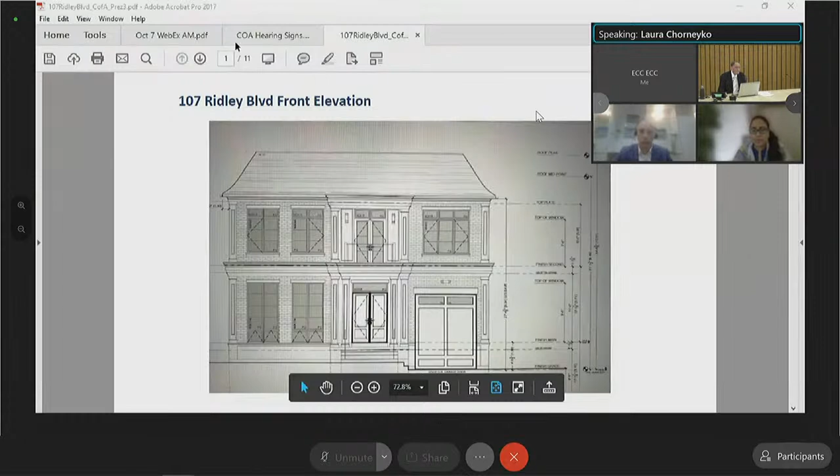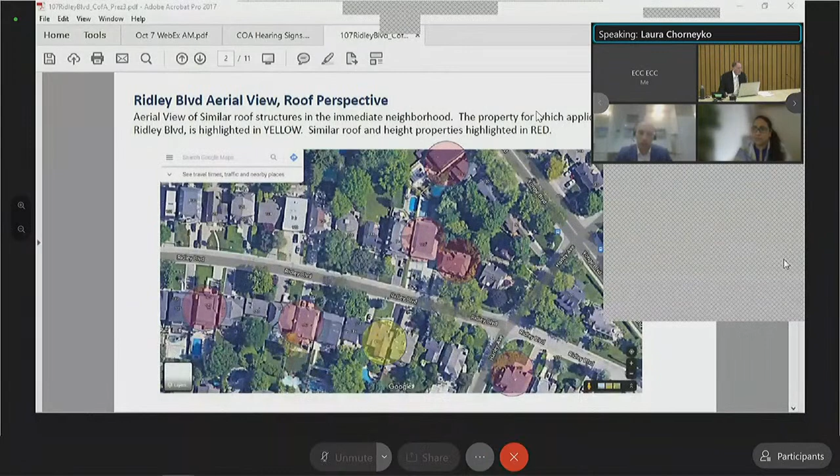The first one would be the roof structure and the aerial view. Next slide, please. I have the aerial view of similar roofs in our block only. They have all the same architectural design as the one that we're proposing, and they're flat on the top. All those houses, next, you can scroll down please, all those houses are in the 10 meter height.

And yes, our roof was deemed flat because we did not meet the slope standards. But at the end of the day, from the street perspective, it will look the same as if it had the full facade. It will be exactly the same height and will not deviate from the current height standards seen on the street. Furthermore, I would like to propose that this variance gets approved conditional to reducing the building height from 10.53, that I'm proposing, to 10 meters, so I stay exactly in line with most of my neighbors.

Also, the letters of objection submitted to this committee, the main concern is setting undesirable precedents. However, during the design phase of this house, we reviewed many committee decisions of the last few years just to ensure that our proposal was consistent with what had been approved in the past. We chose a few ones on our street or close area to present today, so this committee can see that our requests are not unique or disruptive.

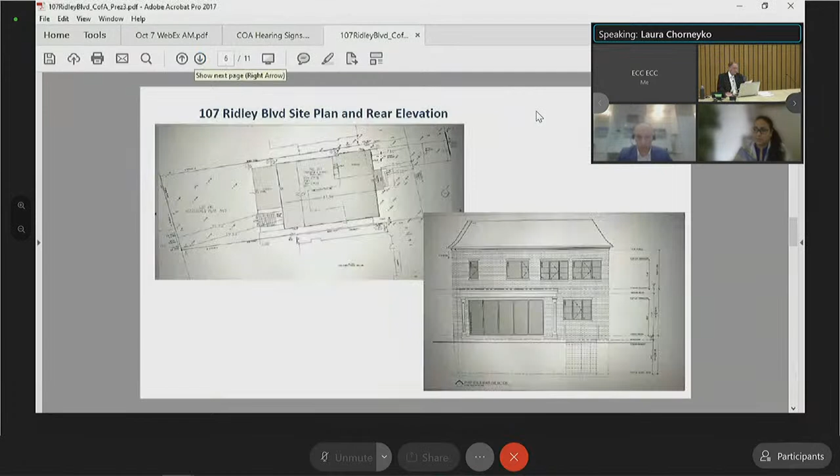Talking about this, next slide please. Talking about the side yard setback, yes, as you can see on my site plan, we reduced the east yard setback. It's mainly due to the fact that our lot tapers on the east side. We try to minimize this issue by recessing the house as soon as the garage ends, so it goes from 0.99 to 1.36. We also did not put any windows on that side of the house to prevent any exposure or lack of privacy.

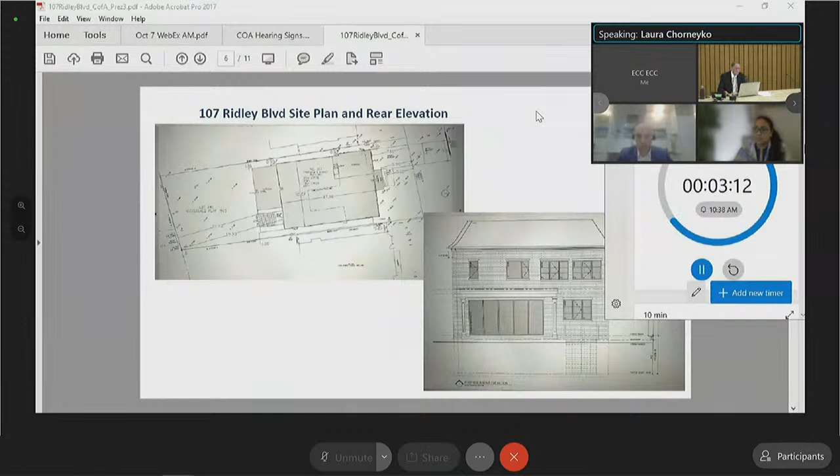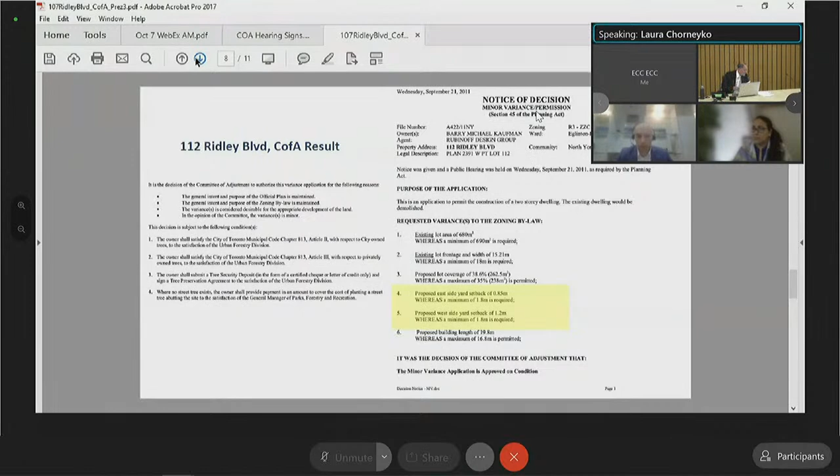I'd also like to point out, next slide please, that 119 Ridley Boulevard setbacks were approved as 0.45 and 0.49, which is half of what I'm asking. In the next slide, you'll see that directly across from me, 112 Ridley Boulevard was approved at 0.85, with a frontage of 55 feet compared to mine being just 50 feet.

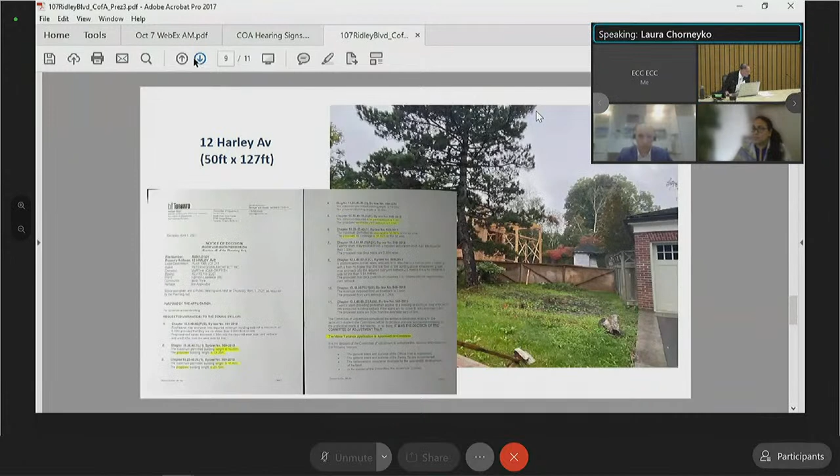Next slide shows that in April this year, 12 Harley, directly behind me, was granted 1.03. So we believe our variance is much in line with what's being approved as exceptions. In terms of depth and length variances, the major issue here is our excavated covered patio. The house itself is only 17.98, and our next door neighbor is 17.5, so we are right there with our neighbor. This was a design decision made to provide storage without compromising the amount of greenery and trees.

We have no access to this area from the house, as it's just for storage. But if we don't excavate our patio, we need to install a shed and remove several trees in the back. Removing the greenery will also reduce privacy, which we know is a major concern for our neighbors, as it is for us.

Again, we are not setting any precedent. As you can see in this notice, 74 De Vere Gardens was granted 21.48 length and depth, and 120 Ridley, a few houses down the street from us, had 24.11 depth and 24.14 length approved, while our proposal is 22.27 depth and 22.55 length. Nevertheless, if this committee feels it's necessary, we are willing to compromise by reducing our length and depth by 1 meter, reducing the excavated area.

The next thing I'd like to address is the Parks and Forestry report received recently. The main issue here is the birch tree. This tree has a diameter of only 31 centimeters, so one year ago it would have been below 30 centimeters and I could have removed it without a permit. So it's not a landmark tree from the neighborhood that needs to be preserved at any cost. Even the condition of this tree is questionable.

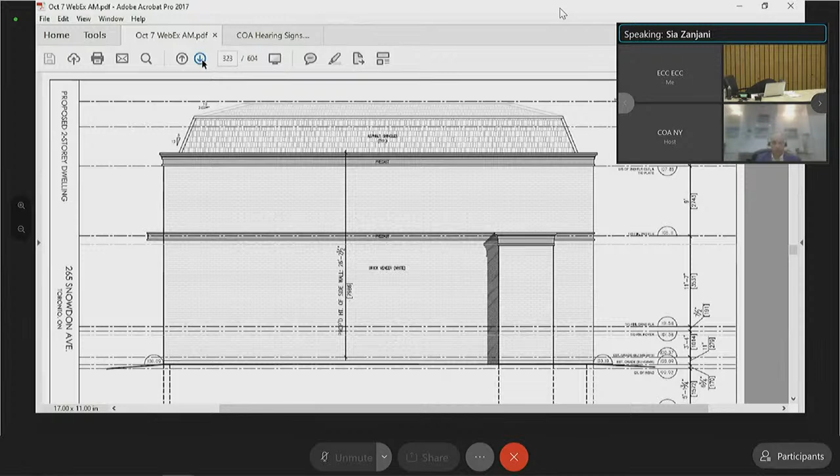In terms of size and FSI, I want to emphasize to the neighbors and committee members that we are 100% complying with every aspect of the zoning bylaw. Even if we comply with the 0.35 FSI and lose an entire floor to meet that, the footprint and massing of the building would not change an inch. That's something I really want to emphasize.

And like I said, our clients have owned this property for the past 10 years. Just recently they decided to build this as their home, hopefully their forever home. They have 3 kids ranging from 4 to 17 years old, with a full-time nanny.

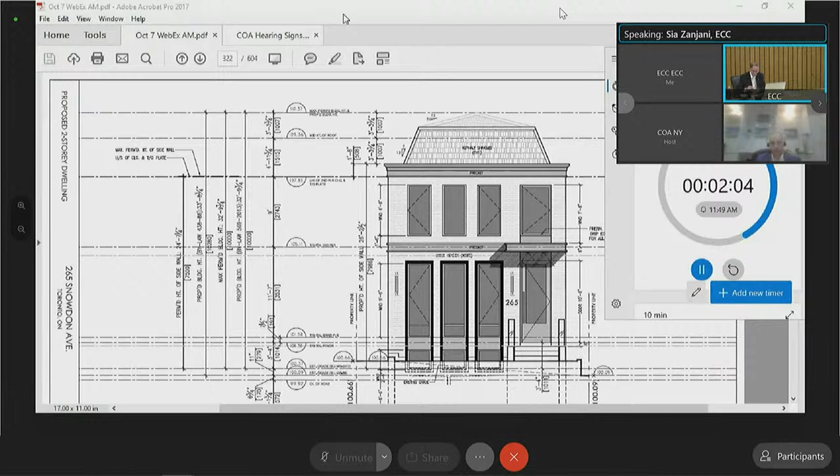Any minor adjustments to the FSI we could probably entertain, but through discussions, neighbors requested FSI as low as 0.5, which would require losing an entire bedroom. As you've probably seen, this is a 3-bedroom house, and they have 3 kids, so as it stands, one of their kids would have to be in the basement. Unfortunately, that's not something we were able to entertain.

Having said that, if the committee members find it appropriate, we are willing to reduce the FSI from 0.678 to 0.67. That would be a slight reduction in length without losing an entire bedroom on the second floor. So we are willing to make that adjustment.

Excuse me, you say if the committee wants, you're willing to make the adjustment, but we don't negotiate. Tell us what you want to change it to. We would go ahead and proceed with that change. So you want to change number 1 to what? Number 1 would change from 0.678 to 0.67.

Okay. And anything regarding water issues, we leave that up to our qualified grading engineers and the well-respected engineers at the city, who will be approving this application later on, to address any issues. And that's it. Thank you. Okay, thank you.

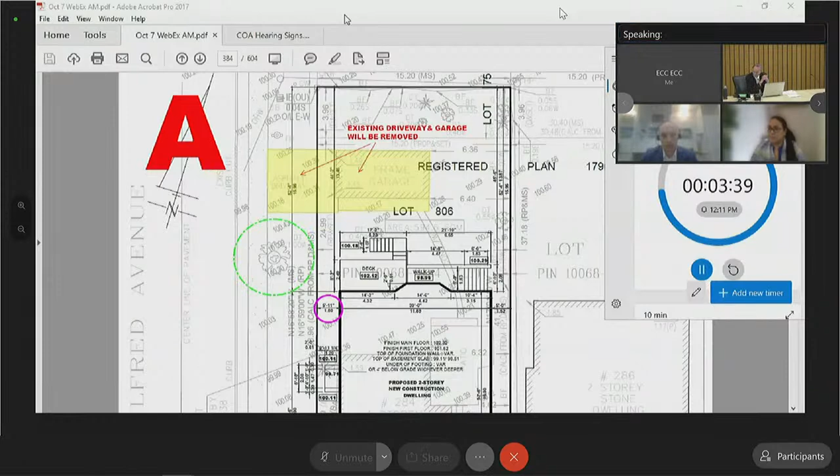I explained to the transportation department that we do need this variance. The main concern is it is not safe to put the driveway on the other side. As of right, we can have this driveway backing into Wilfred Avenue. This is a corner lot. The Wilfred Avenue, Wilfred Parkview intersection has a full stop sign at the Parkview direction, but Wilfred Avenue does not have a stop sign. So a few factors kick in. First of all, the speed of the cars on Wilfred Avenue, they're moving at the allowable speed limit without stopping at the intersection.

There is the presence of very big mature trees that are limiting the view for the cars passing, as well as the view for the person who's backing up from the house into the street. There is a very proximate sidewalk on that side, as you can see on the site plan, which means when a car is backing onto Wilfred Avenue, before the driver is even leaving the garage, the back of the car is at the walkout. This is proximate to Earl Haig School. Many children and school kids might be on that sidewalk, so it's dangerous.

We think that for all those purposes, it's not safe to have any driveway on that side. So I explained this to transportation yesterday, which I eventually got a hold of Mr. Godley Abraham. I have a pile of evidence for almost every intersection in the neighborhood with the same situation working properly. Unfortunately, because I received that objection very late, after our deadline to submit support material, I couldn't submit those, but I'm sure the panel members are very familiar with the area.

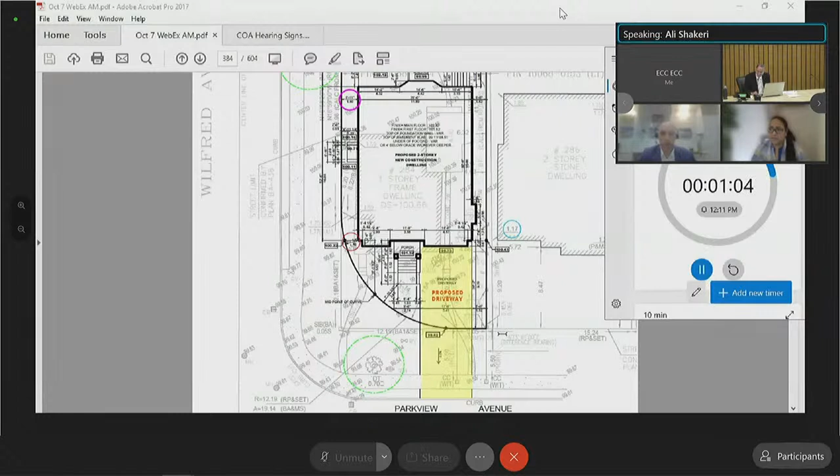You said many others have the same entrance, but transportation is saying this particular one is close to the stop sign. You said you discussed it with them yesterday, what was the result? They didn't respond to my rationale, basically. I think Mr. Abraham was agreeing, or not responding to my rationale. Basically, he left it to the committee to decide.

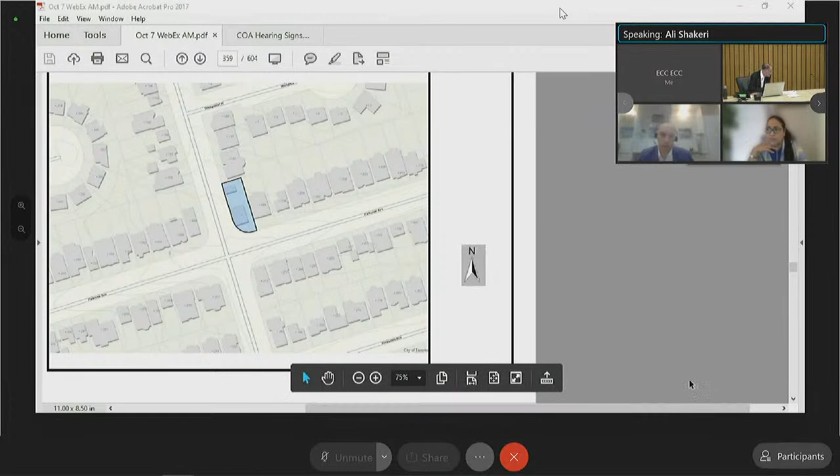But, okay, for the same reasons, what is at stake here is public safety, and we do have to keep the driveway over there for the safety of the public. That stop sign at the corner basically limits the speed of passing cars from Parkview. Also, a longer driveway allows more time and a better field of view for the car backing up into Parkview Avenue, which we don't have on the other side, let alone that Wilfred Avenue is a higher speed street, and cars do not stop at the intersection. So that, I would say, imposes a danger when a car is backing up into the drive.

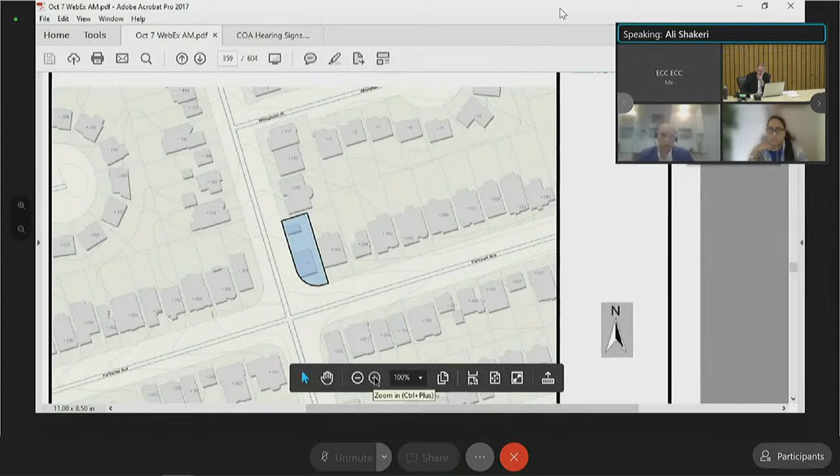Okay, thank you. So let's see what the members are saying. These members, we don't have any other speaker here, just the agent. Any question, Ms. Sankar? Go ahead.

So as I understand it, and I just have to clarify, even though transportation has come back and said, here's the update, it's not an outright refusal, we just want number 7 refused. There was a discussion between transportation and the agent yesterday, but there's been no updates since then to us. So all we've got is what is in front of us, which means I'm not in a position to ignore what transport has said. There is nothing else that's been updated. So I want to offer the agent, perhaps if he needs more time, to defer this application so he can have a discussion with transport, because at this time I'm not prepared to go against what transport is proposing. Through you, Mr. Chair, I'll motion to defer this application if that's possible.

Okay, well, Mr. Shakeri, did you hear what the members are saying? Yes, I heard, and I thank you, Ms. Sankar, for offering that.

I would say that this is going to impose a delay on this project. We can redesign this house with a driveway on the other side, and it doesn't change anything on the floor plan of this house. We can flip the design and have the garage backing into Wilfred Avenue if this panel finds that more appropriate. It rested with me to raise the issue of public safety in this regard, and I do believe it's more appropriate to have the driveway as proposed. But if you agree, I wish to proceed, even if I jeopardize that variance number 7.

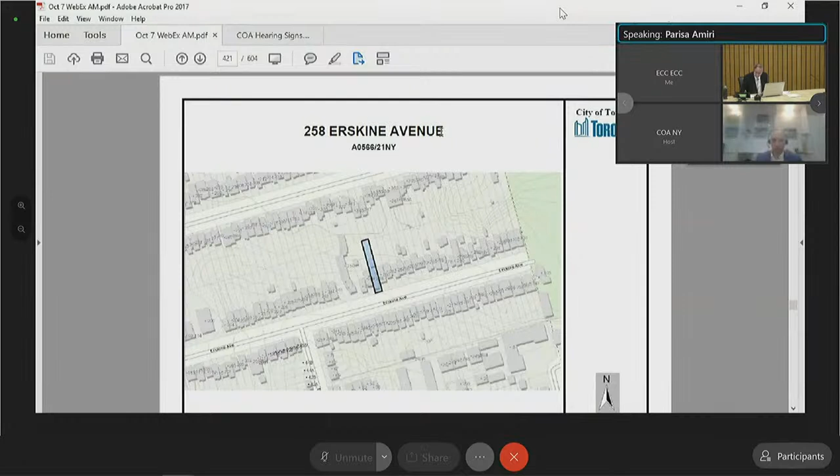Yes, this is a new house that my client wants to build for himself and his daughter. And this is a very deep lot, which is 57.17 meters by 7.62 meters for the frontage. We are requesting only one variance, and we are respecting any other variances that may occur.

And we are respecting any other zoning bylaw. Although my client would be able to build a bigger house based on even the bylaw, we are keeping the space and FSI only at 53% instead of 60%. And this lot is on a positive slope, and we try to bring the house as close as possible to the grade. This is a very unique design my client wanted to have. It's sloped in the front and goes to the back with a flat roof.

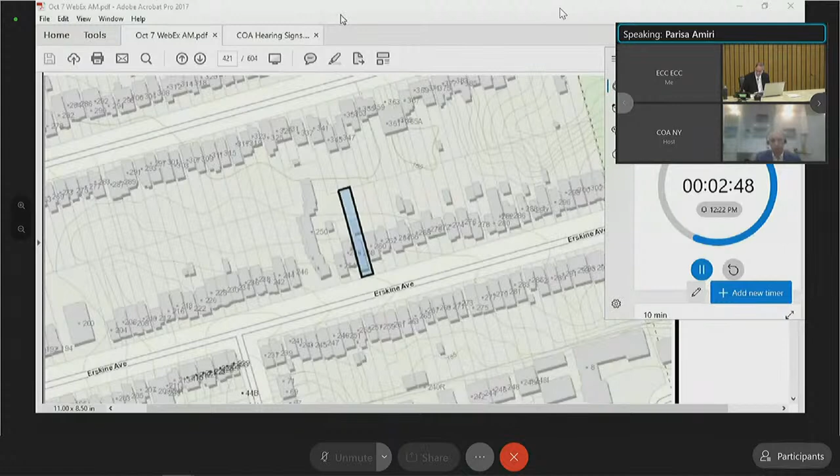And the reason we are asking for that variance is the flat roof at the back. So because it's a combination of these two kinds of roof design, we came under the main wall height variance, and instead of 7 meters, we are asking for 8.53, because they counted to the top of the flat roof. So there is not much I can explain about this application because it's only one variance, dealing with the main wall height, which is a combination between these two roof designs, and we are okay with the total height, which is 9 meters. If there are any questions, I'm happy to answer.

Thank you. When you said the land slopes, is there a difference between the corner of the road and the lot size? Yes. Do you know how much that is? What's the difference? Yeah, I can tell you, it's almost 60 centimeters. Oh, 60 centimeters, okay, thank you. Okay, so we'll bring you back after we hear from the speaker, see what they have to say.

Jim Poole, are you there? Yes, I am. Okay, can you please state your name and address for the records and tell us your concern about this application? My name is Jim Poole, 256 Erskine Avenue.

My concerns are I'm assuming everything is fairly preliminary in the plan that's been presented, and we are going to get some professional help to advise us. Other than that...

I got some simple questions, like there's a board fence shown on the plan that's going to run down the entire side of the new build. I guess the question is, is that true?

Could you please finish? We don't answer your question here. Could you finish and we'll have the agent answer? Your question is, could you repeat that question so she'll understand it very well. In the survey that's online, there's a board fence, a new board fence going to be constructed on 258, on the east side of 258.

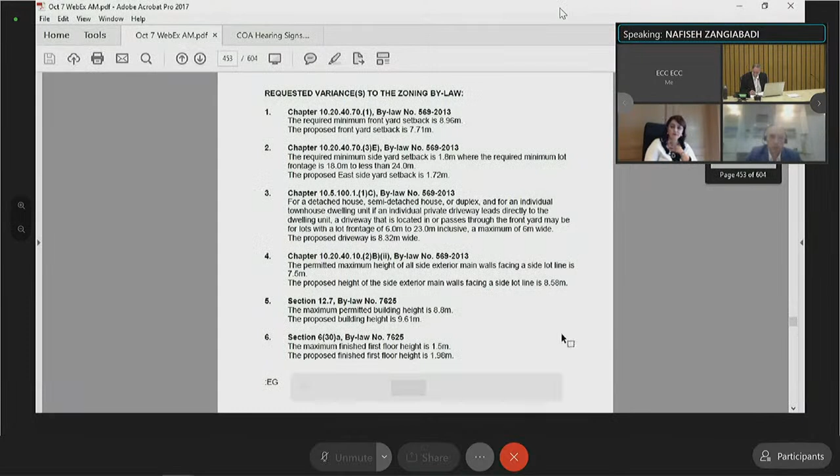Sure. This application is to construct a new 2-story dwelling, and we are actually requesting 6 variances. 3 of them deal with the height. Out of those 3, 2 are technical. Variance number 5 and 6 are due to the change of grade and the way the height is calculated under the old bylaw. We don't have any height variance under the new bylaw.

Variance number 4 is the height variance for the side main walls, and the reason is that we have a gable on top of the window on the side, which gives us the number of 8.58 meters, whereas the entire side wall we are at 7.5 meters. That means most of the side walls on both sides comply with the requirement of the zoning.

Variance number 3, for the driveway, we have communication with the planning department and they're in support of the application because the width of the driveway, which is 8.32, is only within our property. We reduced the width in the public right of way to 6 meters, which transportation is in support of.

And variance number 2, setback, is just nominal and it's only in the front corner of the house, and the way the lot is positioned and the house is positioned in the lot, it's going to increase along the walls as we move further to the back.

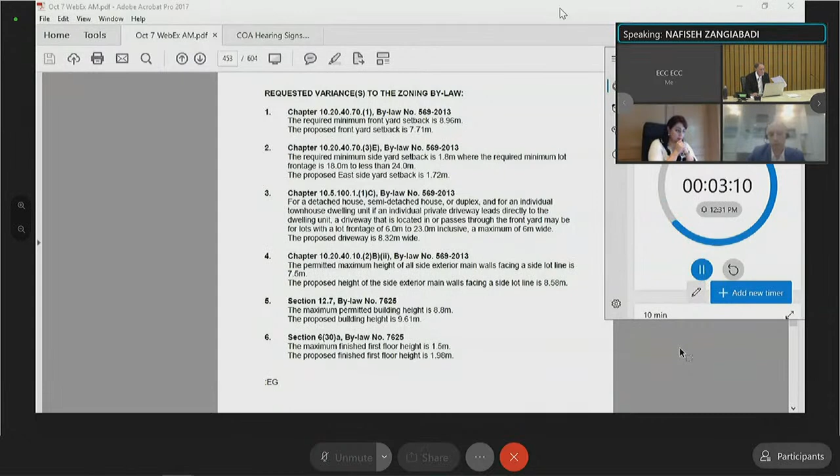And variance number 1, for the front yard setback, we did match the new building with the neighbors to the left to be exactly aligned with all our neighbors to the west. Our neighbor to the east is actually the last lot on the street, after which the cul-de-sac starts. The reason for the front yard setback number is the average of the neighbors, that's why it's a little bit higher. But we did adjust it with our neighbor to the west, and both neighbors are in support of that.

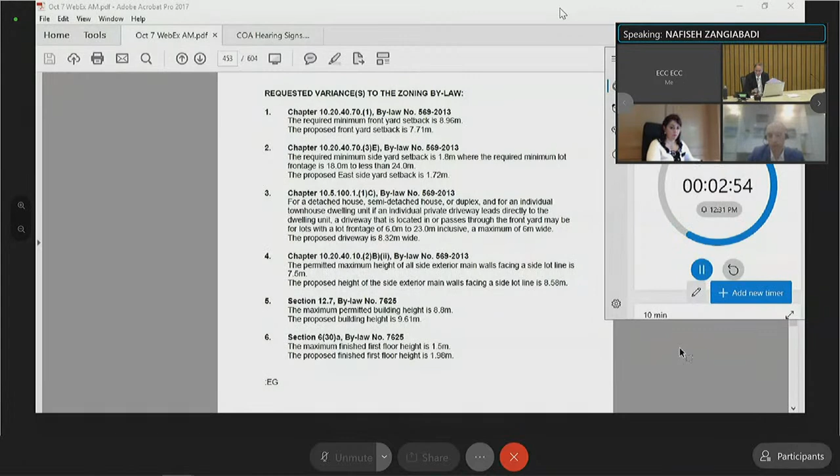That's it? Okay, yes, all right. So let's see what the other speakers have to say, and we'll come back to you.

So, here we have Mitra Izad. Are you there? Mr. Chair, they are not present. They're not, thank you. Next is Yufan Lee, are you there? Mr. Chair. Okay, Yufan Lee, could you please repeat your name and address? My name is Yufan Li. My address is Sumner Heights, 59, North York. Thank you.

Now tell us what's your concern about this application. It's for me, the important thing is regarding the front yard setback. I think it's very close to the street, close to my house. I think I should follow the rule. That's it. Okay, so you have an issue with the front yard setback. Okay members, any other thing? That's it. Members, any question for this speaker? She has an issue with the front yard setback, so we'll have the agent come back and explain.

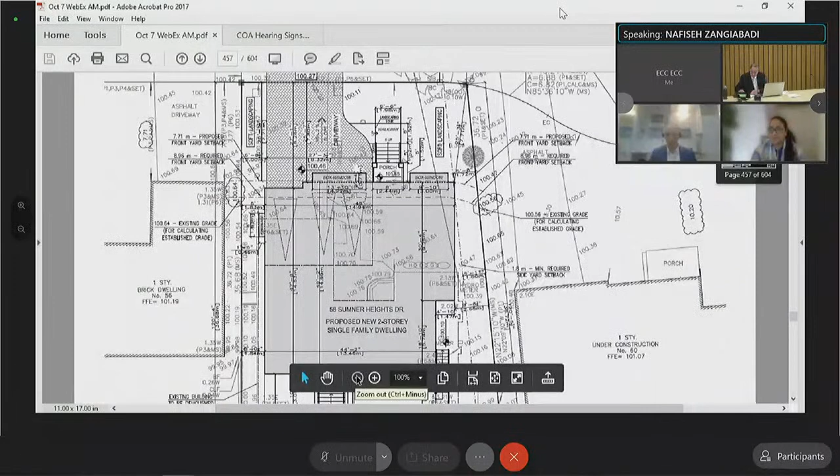So if you add up those numbers, 7 meters on our side, 10 meters on their side, about 10 meters for the Sumner Heights drive, we're almost 30 meters, like 90 to 100 feet, from the buildings. So I don't see any privacy issue in that case, especially when all the buildings on this side are aligned at 7.71. We did actually try to match with the streetscape and not change that. The staff are in support of that, they didn't have any issue with it. Our immediate neighbors are okay with it, so I believe that's a minor variance, trying to match with the streetscape of Sumner Heights Drive.

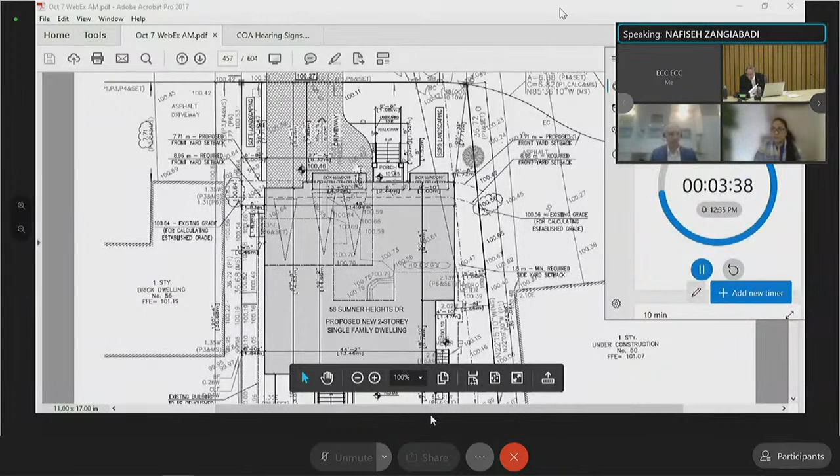Okay. Any question for this speaker? If no questions, can I have a motion then, please? Ms. Sankar?

Through you, Mr. Chair, I do understand what the speaker was talking about with respect to the debate around variance number 1, but in the explanations of the agent with the average, taking the average on both sides, I do believe that this is reasonable. In looking at the entire application, I also feel that it's reasonable and meets the 4 tests. So for that reason, I'll put forward a motion to approve this application.

I'll make it subject to the September 30th staff report that the side exterior main wall heights be developed substantially in accordance with the east and west side elevation drawings. I'll make this subject to forestry as well, and transport has no objections, and that's my motion. Second? Mr. Klassen, second. All in favor? Okay, thank you. Your application is approved, subject to the staff condition and forestry.

Okay, application number 16, which is 9 Dornfell Street, application number 16.

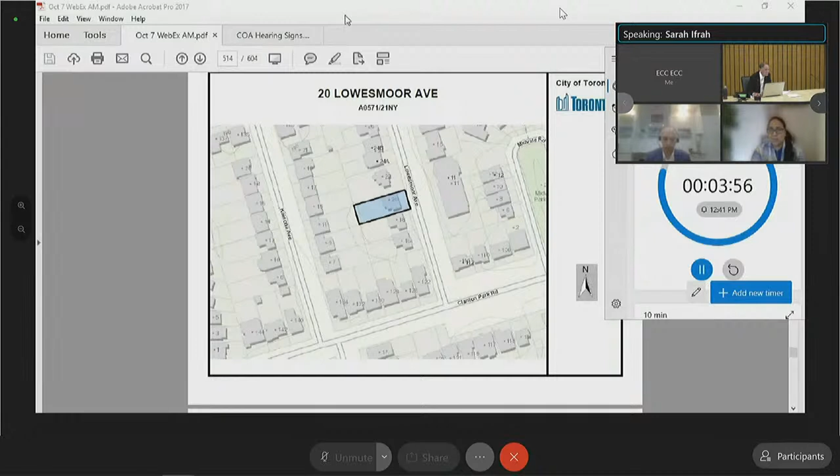And then I'd like to address the staff report. I'm sorry, I'm kind of rushing through, but I see my time is running away here. Okay, so if we look at, there was a set of drawings I sent that had a red box, if we could pull up that correspondence, a red box around the site plan and the elevation. When the staff report talks about the overall height of the building, it's a bit technical. The visible height of the building is 9.97 meters, and the 10.38 goes to that slope to drain, which I think you guys are very familiar with. We've spoken about this a number of times. So from the street at the ridge point, it's 9.97, just under the 10 meters. And once we put some slope to drain, it ends up being 10.38. So that's slightly technical. When he speaks about the wall height,

that wall height is taken to a dormer. I don't understand why, I've never had that happen before, because if you look at my side elevation, you'll see they're actually popping out of the roof. There's no continuous wall that goes up. Oh, this is a good one too. So you see on the 3rd floor, it's all contained within, nothing is coming up straight from the 2nd floor. So the actual wall height at the front of the house is 6.89 meters, and at the side is 7.07. And then I have a total of 3 dormers on the sides in my roof.

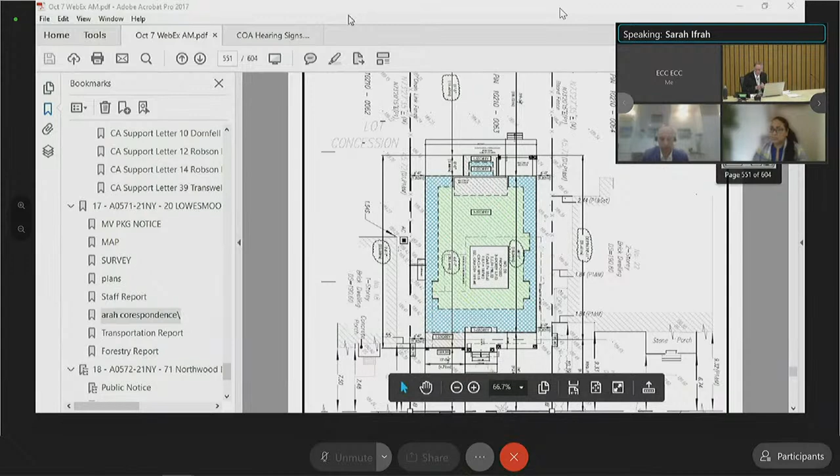In that one, you're going to see that there are 3 other homes I've designed in the neighborhood that are actually 2-story homes, and you'll see that this house is no taller, doesn't look any more overwhelming, doesn't look overpowering.

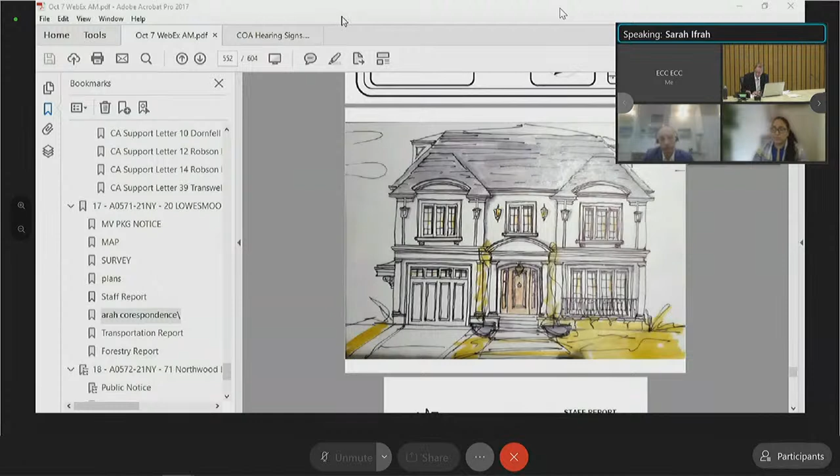I'd also like to point out that our side yard setbacks, we've maintained the 6 feet. And again, the overall height of the house is visibly only 10 meters. We do have support. Now, I don't know if the committee has seen it yet, I sent it to Brendan this morning.

We do have support from number 18, from both the owner of that home, which is the house to the south, which is the most affected because it's considerably smaller. The house to the north is new, but we actually have a letter from both the owner and the renter. The renter wanted to support as well because they're the ones truly affected by something that's going to be built, since they're long-term renters. The house to the north, we had discussions with them as well, and they had no opposition. Some people just don't like to sign things, so we don't actually have a letter from them, but we do have a letter from our south neighbors, both the owner and the renter.

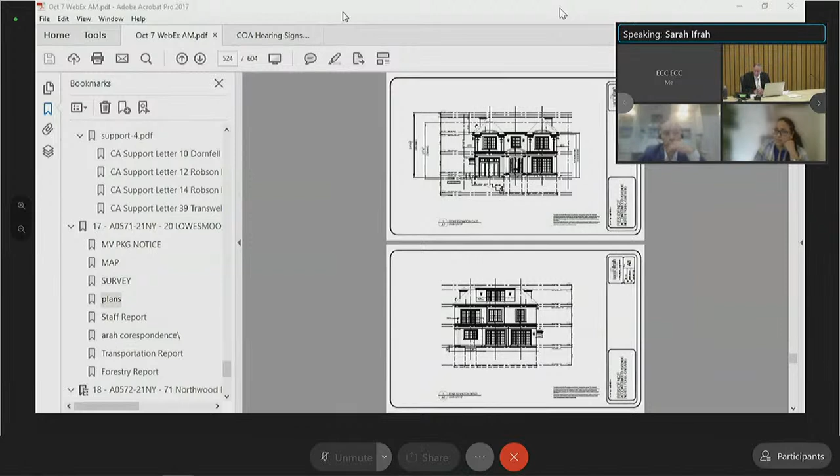In terms of the changes he mentions in the staff report, we have no issues with those changes, and those are the ones I mentioned as we started. There was a note that the last paragraph says the platform area is 15.25 — it actually got smaller. This is the drawing I want to talk about. It actually got smaller when we made the house a little bit smaller, and most of it is recessed.

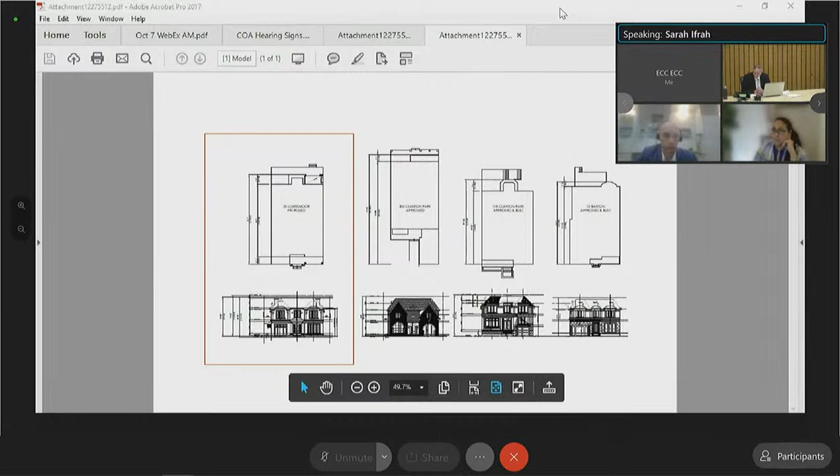Again, if the neighbors don't have an issue with it, I'm not sure why it would be an issue. I think life has changed nowadays, everybody needs a place to study, needs to work, so it's nice to have a little bit of an outdoor space. But we kept it recessed so that it's not full overview of the neighbor, and there's never going to be a party up there — that's not what it was for. It's really just to bring light and air into that 3rd floor space.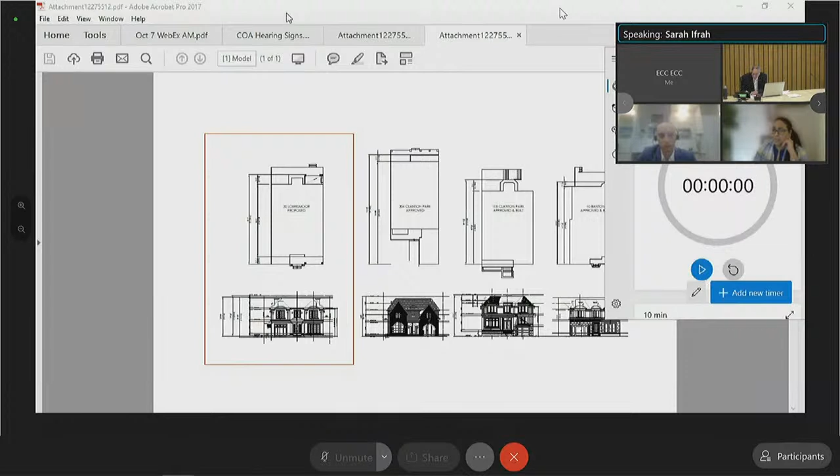So this drawing was the one I spoke about. If you look at the length, the overall design of the house, it's very similar to the other 2-story homes. Okay, done. You were going to stop me anyway.

Well, I think you know the drill. So you covered the parts that staff mentioned as you indicated to change, which is revised by the applicant number 1, 5, 6, and 10. Now, you did not mention anything about the staff recommendation for refusing 2, 3, 4, 10, 11.

So I went through the reasonings, because that refers to the building height, the wall height, and the 3rd floor. For the building height, I said the visible height is under the 10 meters, and the 10.38 is really just to the slope to drain. The wall height included the dormers, which I do not know why, because the wall does not continue straight up — the dormers are set into the roof. They're minor and they're into the roof. The actual wall height is 6.89 and 7.07.

Again, this 3rd floor thing comes up very often, and you guys know very well, I present many 3rd floors. I like to keep them hidden. I don't allow most of my clients, unless it's part of the design, to put windows on the front. So this one, from the front of the house, really looks like a 2-story dwelling. If you look through your file and see the rendering again, those were the main issues, and that's what those variances in terms of the list referred to.

So the main problem is privacy, and when privacy is taken, that can affect the general value of the properties too. That's my concern.

Okay, very good. So you're concerned about number 8, the number of stories and the balconies, and the size of the balcony, number 10. Let's see the members. Any questions for the speaker?

Mr. Bartolo? Yes, thank you Mr. Chair. Can the applicant just confirm the changes one last time, please? We have to hear from the other speakers first. We have another speaker, and the agent mentioned the changes. I'll wait for the agent to come back to confirm and make sure I typed in the right numbers. Yeah, we have the changes here.

Sarah Henitz, are you there? Mr. Chair, they are not present. Okay, thank you. So Ms. Ifrah, could you come back please? The member was asking to go over the changes you made. Could you please repeat them?

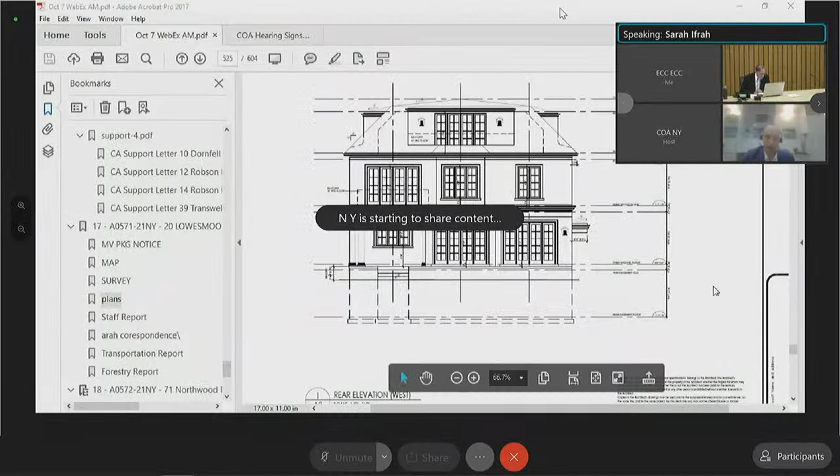And at the second floor, the same thing: it's 51.5 feet away from the rear yard. If you look at the back of this house, it doesn't look like an apartment building to me. I don't take offense, and nobody should think I'm feeling offended, but I don't think it looks like an apartment building - I think it looks like a home. And that third floor dormer is recessed into the roof.

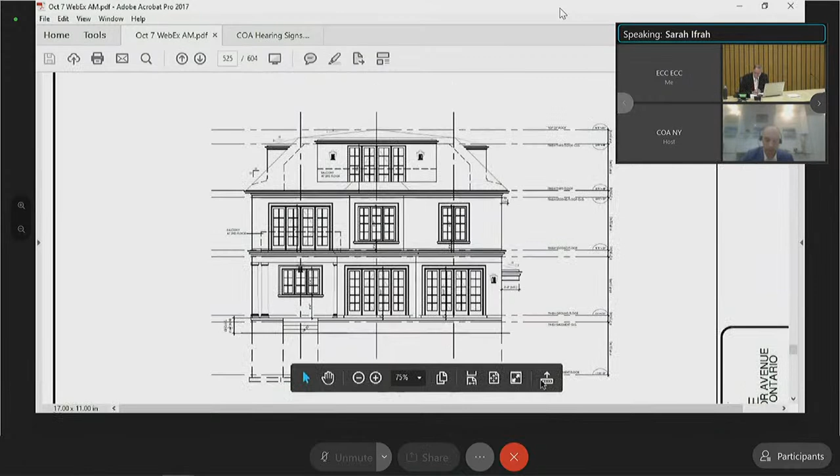No matter what, on a third floor we need some sort of platform as a code requirement, so there would be a balcony there, maybe smaller. We've done this a number of times, and no neighbors have had issues because we're so far away from the rear yard neighbor that it just doesn't create a privacy concern.

The two people that could have an issue are the two side neighbors, because those are the ones we could hang over the railing and look next door. But both of those neighbors do not feel their privacy is an issue because of how my client is going to use their outdoor spaces.

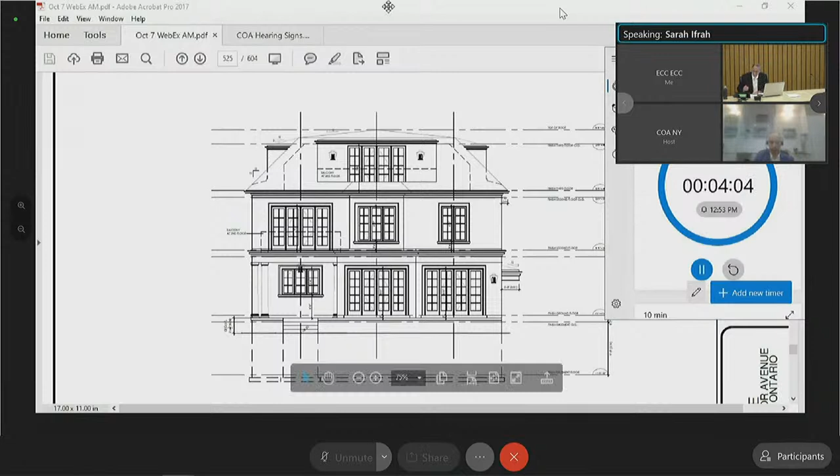That's it? Yep, yep. Okay.

So in that case, did you discuss that with the staff who are proposing this refusal about your, especially the 3-story that looks like 2-story and so on?

Yes, and the answer I usually get is that no matter what, if you have a 3-story dwelling, you will get a negative staff report or a staff report that asks to refuse the 3rd floor and any variances associated with it. But again, I've presented to you guys a number of 3-story homes, and a number of them are built. So the committee members that know me and have been here have seen those photographs of the built homes over and over again.

My 3 stories, I try extremely hard to make them look like 2 stories. And that's the way it's going in the neighborhood. I'm also always very clear whether it's a technical 3-story or a real 3-story. And I've got neighbor support. I've had neighbor support down at the Lawrence and Bathurst area, and I've got neighbor support here. This is the way these areas are changing. They're large families. Corona brought on a whole new use for our homes. We work there, we teach our kids there. People do need more space.

Okay, thank you. Questions? Yep. Mr. Chair, sorry to interrupt, if I may.

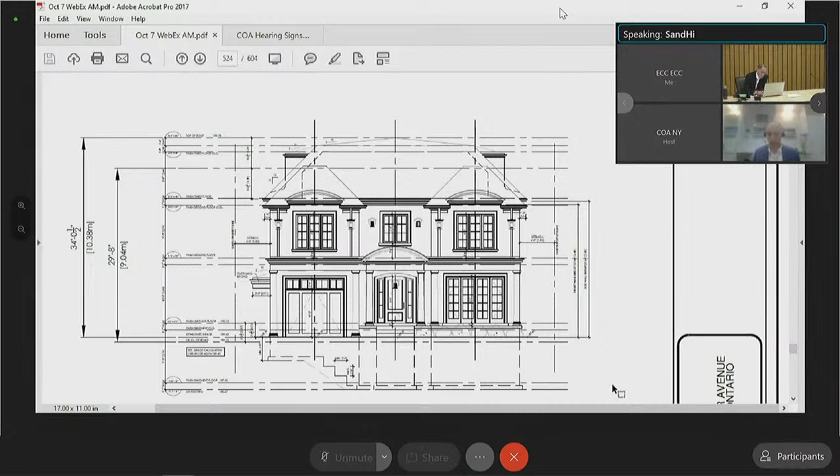Thank you. Any questions for the speaker? Ms. Ifrah, did you want to add something in light of this?

Yes, I'm actually surprised because my client did go to the neighbor and they didn't seem to have any opposition at the time. So I guess I take that back then, I'm not going to speak for them. But to address the issues, again, the 3rd floor is contained within the roof. If I don't have a 3rd floor, the house will look absolutely identical. I could even put dormers in the roof as a decorative thing, and the house will look exactly the same.

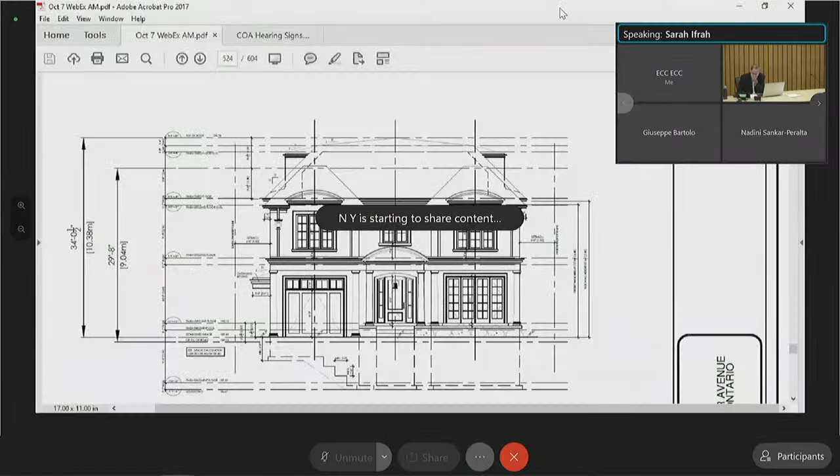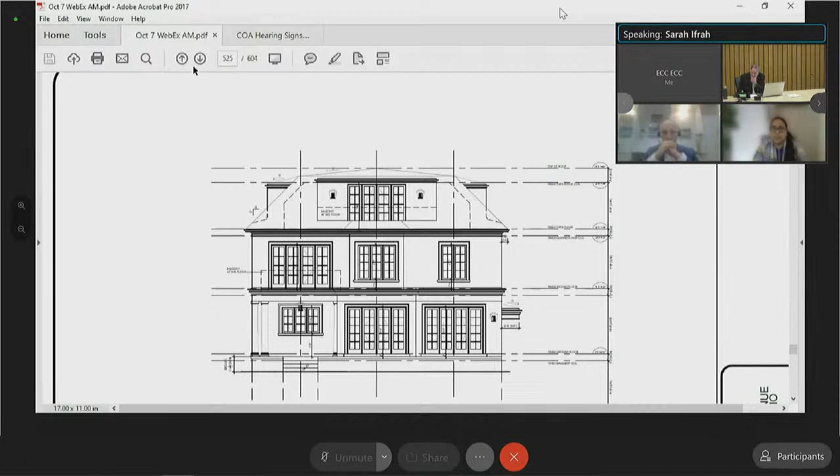The question of the balcony and the overlook, we've recessed it for exactly that reason. We don't want it to affect neighbors' property. We'd have to have a balcony no matter what on a 3rd floor, so should we be granted a 3rd floor, we would need that little space to get out. Ours happens to be a little bit larger, you're allowed 4 square meters and we've got 13, but again most of it is within our roof. On the 2nd floor, I could have the exact same balcony, just make it 4 by 10, put my glass in, and end up with the exact same quote unquote privacy issues.

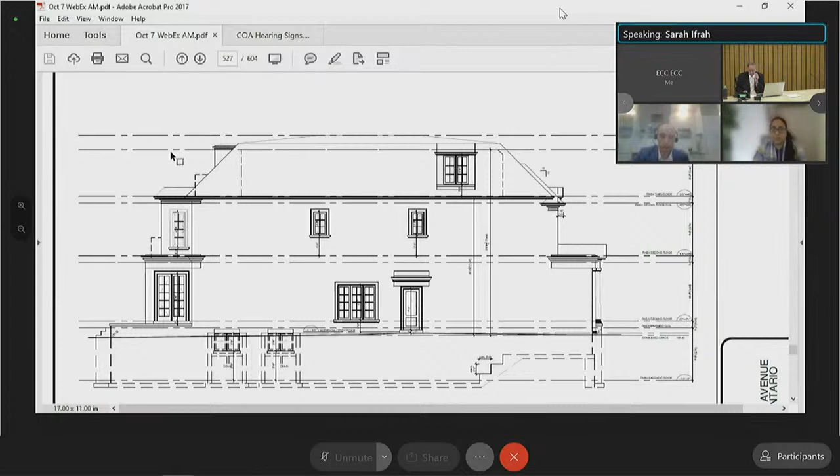But again, we can put up a privacy screen. My client does not want to be stared at by her neighbor the same way her neighbor doesn't want to be stared at by my client. So in terms of the 2nd floor, if a privacy screen would solve that issue, we can always write that in. And for the 3rd floor, there's already a built-in privacy screen because it's a recessed balcony, which you can see quite well from this elevation.

Members, any more questions for this? Ms. Tarodi? Yes, just one question.

I would like to ask Ms. Ifrah that the site plan she submitted to the committee on 23rd of September, does that site plan reflect the modification in depth and length that you mentioned just now at the floor? Yes. So the modification of the depth and length is reflected in the site plan dated September 23rd, is that correct? Yeah, there's a full set of drawings, it's all revised.

Yes. Thank you. Okay. Any other question? Ms. Sankar, question or motion?